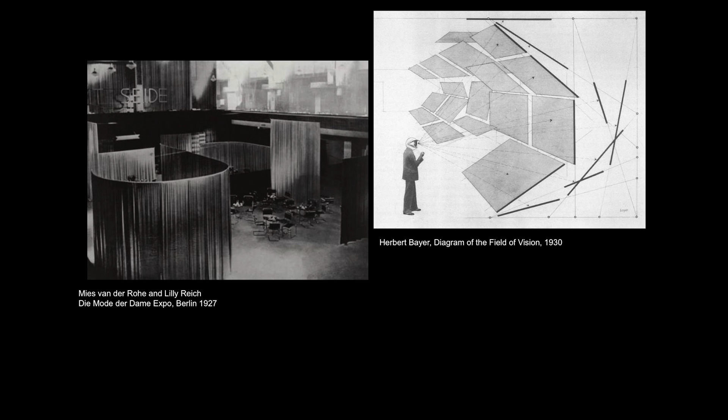We looked at that exhibition quite carefully. I even sent someone who helped me a lot with this exhibition, who I just saw, Colin Spurlman. We said, hey, if you can do it with film, maybe you can do it with architecture. So we looked at other precedents.

At the Centre Pompidou, for example, Morphosis had a large floor with lots of little miniature models, or other examples—Renzo Piano, which you saw here in New York a year ago, or another example of Richard Rogers in London. The point was, that couldn't have been what we wanted to do.

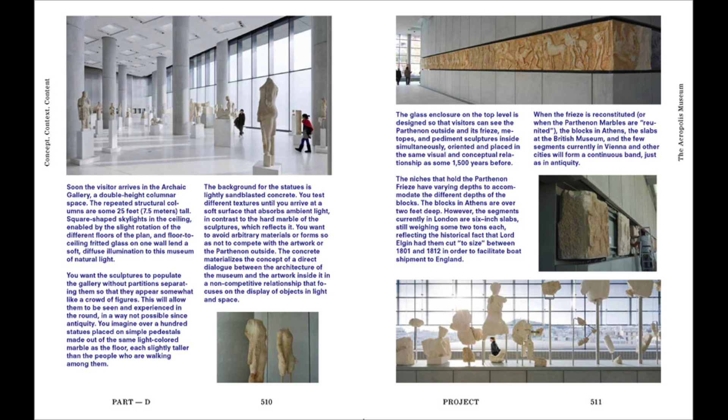These ads were really trying to ask those questions about space and events, about constraints as well. And that led to the Manhattan Transcripts. I'll go quickly because now I want to go through the exhibition itself. So the book was trying to retrace these different moments, including things as crucial as the Acropolis Museum building, or more recently other projects which asked again that question of the relationship between space and material, about materiality, even arriving at rather amusing things when your client is a giraffe or a rhino.

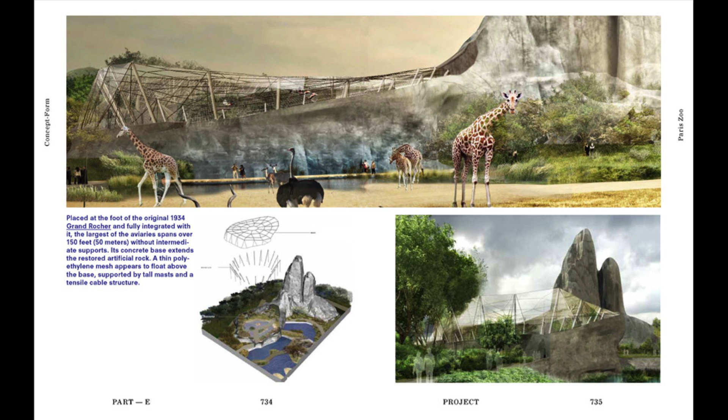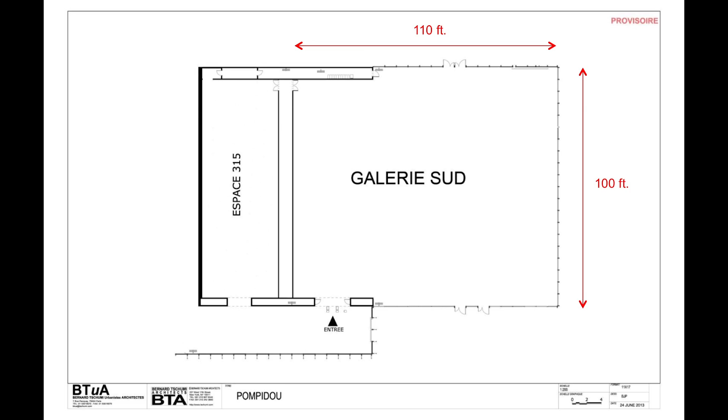A quite unusual challenge, considering that three of these walls are glass walls, in other words they open toward the plaza, and only one wall is solid. So of course it's fascinating as an architect, because you ask yourself first, how am I going to do that? Do I do it with objects, only models? But our models are generally small.

We started to look at themes. These themes could be space and event, the Parc de La Villette, or the idea of program, or the idea of concept form, or things of this sort, which very much came from a series of books that we had done over the years.

In the early days, we didn't have anybody to prepare archives or anything like that. So we thought, since it was so hard to find any drawings that we had from a project we'd done in the past, let's do books. It's faster to look at the dictionary, at that catalog of projects, rather than trying to go into drawers and files. It was pre-computers at that time.

Every one of those thick books, 600 pages or so, was every time trying to find a common denominator of the projects within those pages. So one had to do with space and event, another with the juxtaposition of programs or incompatible programs, another with the idea of context and concept — what is the relationship between concept and context, what is the relationship between content and context, and so on. The last one was about form for the first time. I'll come back to that again as well.

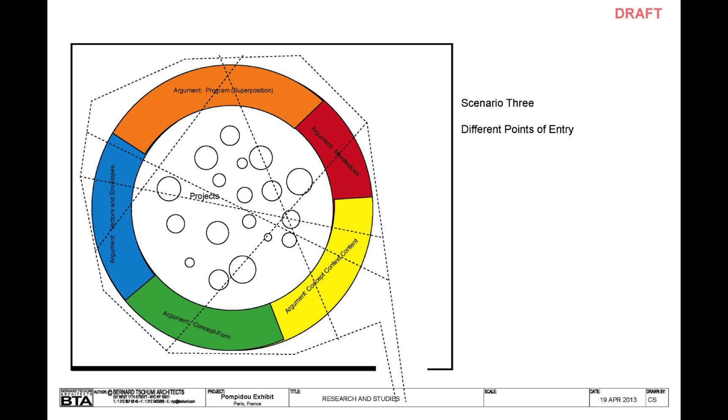So we tried, within that huge square or rectangle of the gallery at the Pompidou, to organize these themes — circles, labyrinths. I was then finishing the zoo, the Paris Zoo, which I'll come back to again, as you will see, which has a certain number of aviaries.

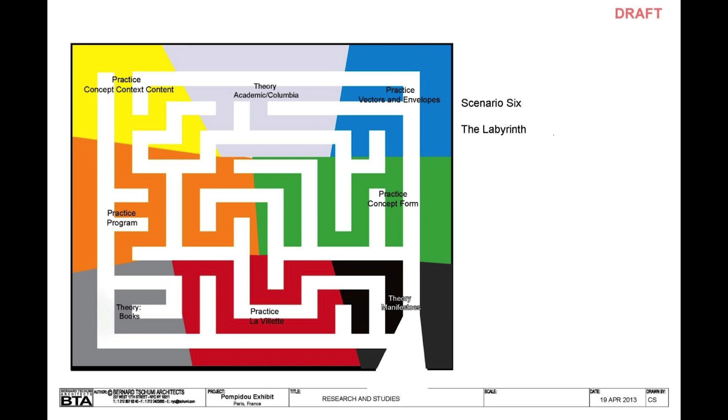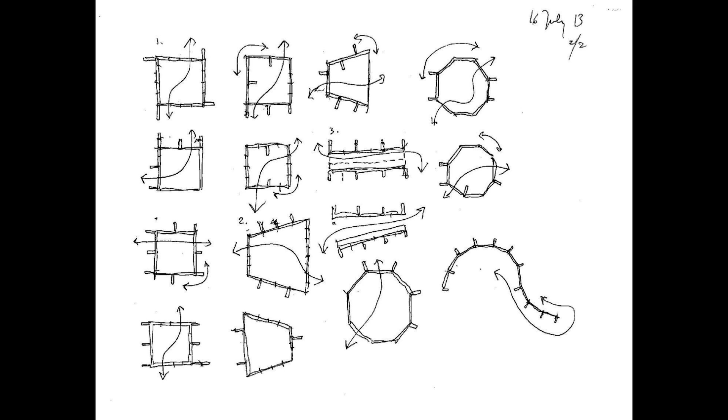And I really like the idea of these aviaries, which are cages, but not quite — they're transparent, but you don't know who is inside, who is outside. So we thought, hey, maybe we can do this, we can organize our exhibition within — since we were opening the zoo exactly two weeks before the opening of the exhibition — why don't we say, just like at the zoo, where a cage or an aviary is as much for people as it is for animals. The whole zoo works on that notion of not differentiating between the habitat of one species versus the other.

So we started to develop a series of enclosures. At first they were made of mesh, exactly like the aviaries. We tried to find also something which had to do with the fact that we had a lot of documents that we had to locate, but again, this will come back in a minute.

You may remember the famous map of Guy Debord, of the situationist, the so-called dérive. We looked at the various themes of the exhibition, the five themes, as a sort of dérive, a sort of drift, so that people could move from one to the other, either in chronological order — we tried really to make them in chronological order — but we knew some people would evade, would escape. So we started to make those in different configurations, with quite a number of alternatives in their location within that space.

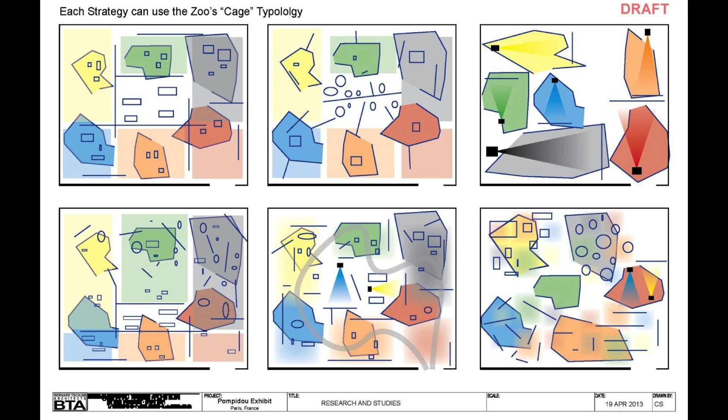We were quite interested in the fact that it was a good way to take over the space, to control the space simply through objects. Of course, you may think of Le Parc de la Villette, which is made of a series of small red objects which allow you to control the space as opposed to walls or whatever.

And then we brought a certain level of rationality into it, took the themes that I mentioned, space and event, or context and concept, or form and concept, and mapped them in relationship to the media we use. That's the blue part, the blue ellipses.

In other words, you as an architect, if you build something, you use a certain media. If you do a drawing, you use another media. If you talk, like I am tonight, I'm using again another media. If I write about something, I use one more. And if I make a film or an animation, every one of these media is quite different from one another. That was important if we were to show how the work unfolded.

And then the little pink rectangles are, of course, the various projects we wanted to show. And then we started to play like a matrix, overlapping the different criteria, and then tried to put the matrix into space.

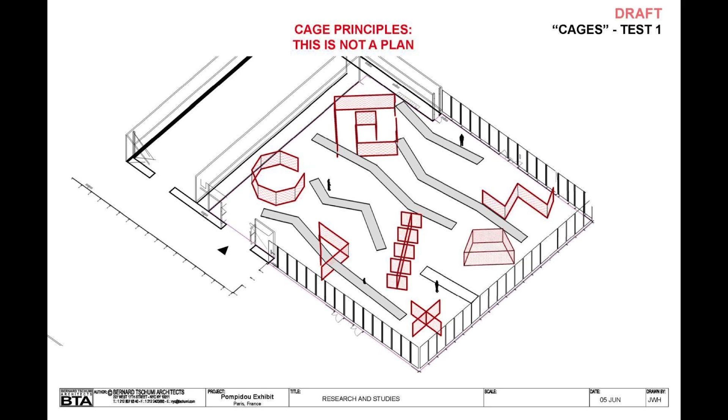And then the tables. The tables were important because as we were organizing the exhibition, we found—I mentioned earlier that we didn't have much of an archive system—but when you organize an exhibition, you open a lot of drawers that you haven't opened for 25 years, and you find a few amazing things.

So we wanted to show them almost as an entomologist would show precious remnants or whatever. We did it first with these thematic bands.

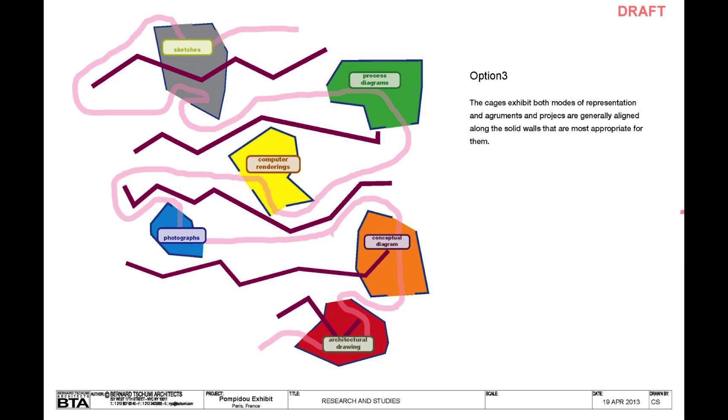We then had the intersection of the bands with the various pavilions. You can use them like that as well.

And then we developed a whole language of caption. Captions were incredibly important because I do not think that architecture can exist without words. I will disagree—some of my colleagues will disagree with me.

It's very simple. Architecture has to do with its own vocabulary. The vocabulary is important—things called columns or pyramids or labyrinths. These are also metaphors that are used by our whole society, and these cannot be distinguished from the act of building itself.

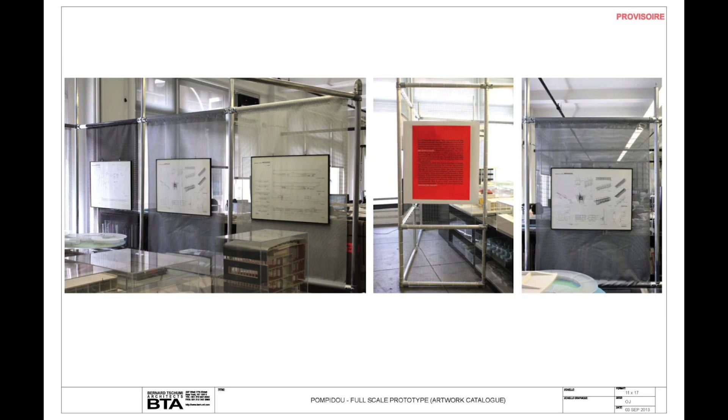We did also a series of mock-ups in our office of those enclosures with mesh, and I won't go into the detail of the reaction of the curators when they came and said, you can't have mesh because you see the legs of people walking behind, or you see the back of a drawing behind the front of it, and so on.

So we tested those, and eventually arrived at this particular image showing the transparency, but also this incredibly important red wall, which was, as I said, the only wall that was there on site.

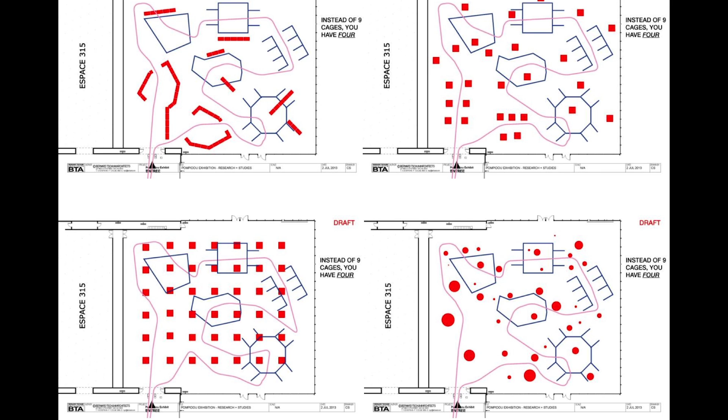I mentioned that the tables didn't quite work as a linear thing, so we could not—and I have to say that was a nudge of the chief curator saying, as we were testing, 'Why don't you do a point grid?' And of course, we did.

So each of the tables was quite important because they were these places where the archives were. And so here you can see the plan of the exhibition itself, a view from the outside.

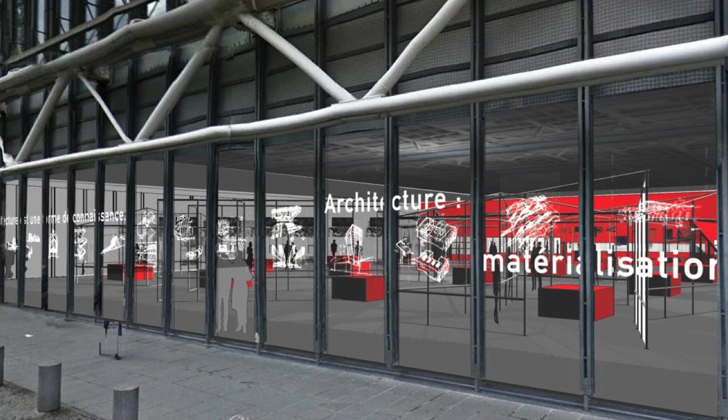Now I'm going to take you quickly through so you have a visual image of it before I start to talk about the content of it.

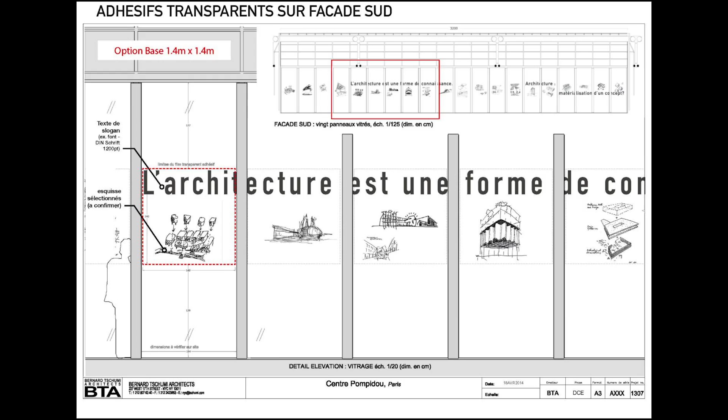In other words, you can see—I mentioned that we have a big glass wall at the Centre Pompidou—so you could see from the street through layers of graphics, you could see the exhibition itself. Probably, while I think the exhibition was visited by just under 100,000 people, there must have been 1 million people who walked past.

So the project becomes really a way to engage the viewer into the work—not only showing it, but literally getting people to do it themselves, with very short text. By the way, you see here on the left wall the Manhattan Transcripts, shown for the first time all together in one single place.

The Manhattan Transcripts, a piece of work I did over a period of 4 or 5 years in the early days here in New York. Some of it is at MoMA now—actually, all of it is at MoMA.

So these are some images of the installation with the enclosures. The enclosures are simply made of hardboard, because the union—I don't know how you'd call the people who hang the work—wouldn't do anything on canvas or on mesh. So we had the cheap boards, but it looked quite good.

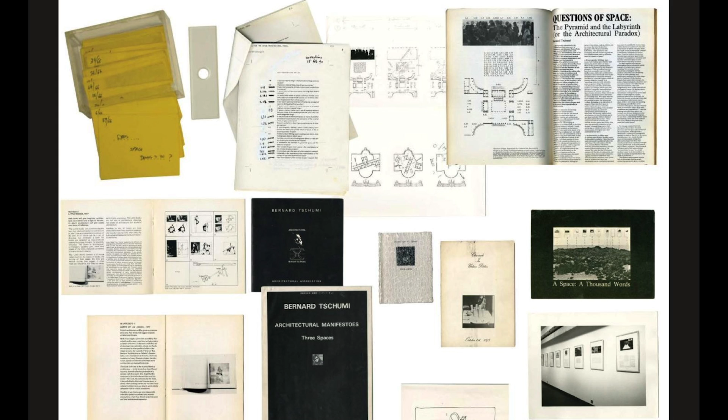And a variety of other texts which were there, from Bataille to Barthes to Roussel and many others, that could act as a companion to architecture, leading to certain important pieces of work which at the time would have been called paper architecture.

So hence this start—I've been quite long going over these preliminaries—seemed important in order to indeed activate the interest of the viewer.

And so then the exhibition would start with that big red wall with the Manhattan Transcripts, which, for those who don't know, are a bit like a B-movie script. It's a form of notation. The subtitle of the exhibition was Concept and Notation.

In other words, a way of thinking how to draw as an architect, how to draw things which are not quite architecture—not simply having the role of the axonometric, the slab, or the columns, but perhaps questioning it in different ways, saying that there's no architecture without movement.

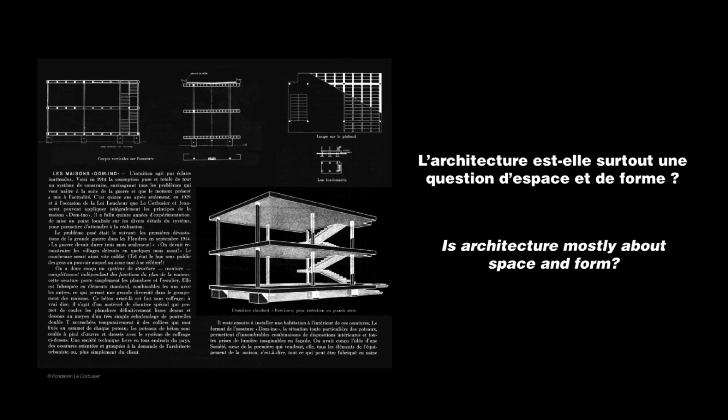You have to find—if I don't draw movement in a plan, a section, or an axonometric, then I'm interested in finding out how to notate, to find a mode of notation for movement, and of course also what happens in it. The exhibition, the transcripts, were really introducing the viewer to this idea that one could perhaps find a mode of notation for things that are normally excluded from the architectural discourse.

The layout of the long drawing—one of the drawings is 32 feet long—was a reminiscence of the first time it was exhibited at Artists Space, which was then on Hudson Street. I think I might have been one of the first, or the first person in this era, to have an exhibition in an art gallery. Architectural gallery had another agenda at the time.

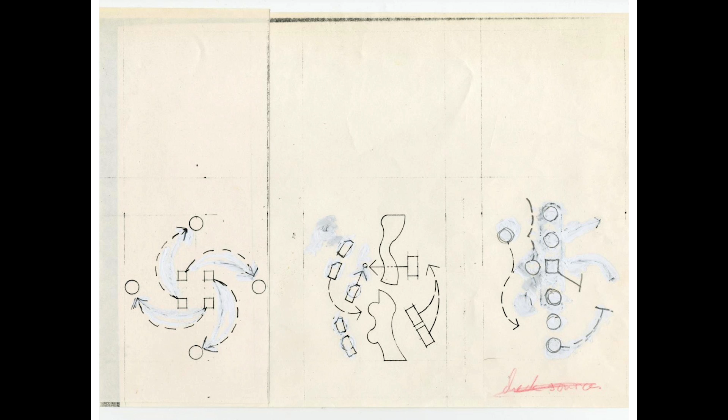Back again, you understand the issue of movement and spaces, and of course the image of Trisha Brown dancing on the walls, on the roofs, was quite important. A number of those documents, those early notations, some self-generated, some found in dance, in theater, in sports, were shown in order to explain the genesis of the transcripts themselves and, of course, the future work. It's not the place here to discuss in detail the various episodes of the transcripts, but suffice to say it was a way to make movement and event absolutely indistinguishable, in a way, from architecture itself.

How can we explain these types of things to a larger audience? It occurred to me that I could potentially do ads, advertisements for architecture. These were amusingly published for the first time in an issue of Oppositions, in an article about transgression. This image showing the decay of the Villa Savoye was an important part of its effect, in a way.

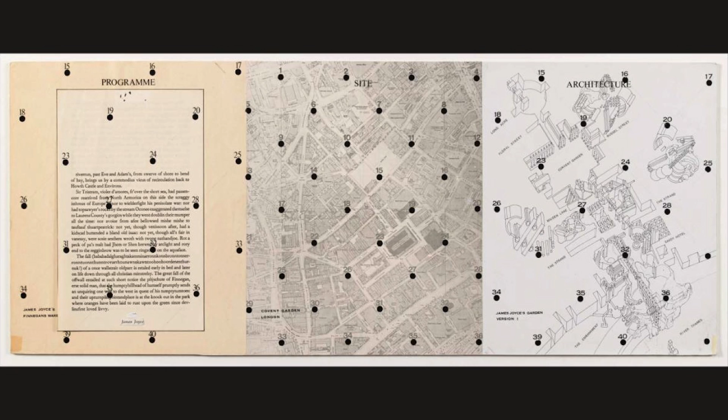At that time I decided to do it myself with my students, starting by first establishing a grid, a point grid, and using the point grid as a way to anchor the discussion and the discourse, developing a project which would indeed be not a transposition, but a sort of re-questioning of ideas about language in an architectural manner—in the same way James Joyce had asked certain questions in a literary manner. In other words, not trying to transpose or imitate, but simply saying that in other fields there are certain questions, perhaps coming with the 20th century, that are of interest to architects.

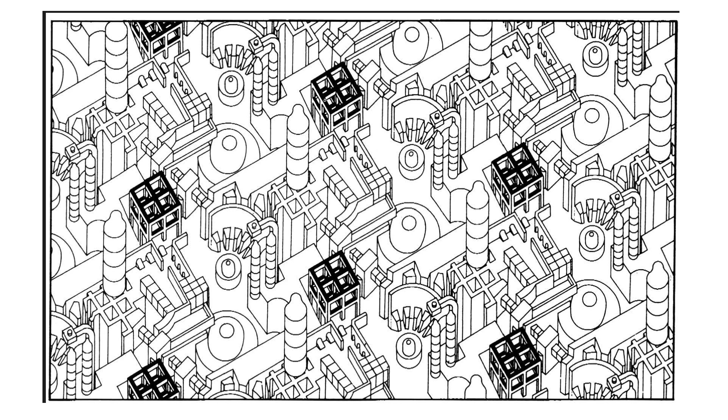I'll leave that—a little work where everything is drawn by hand, right on slides. You don't do that with a computer anymore, but here you would draw your drawing, about 1.5 inch by 1.5 inch. You project it, and you can have an instant lecture. So that was the early drawings.

The James Joyce Garden I always present because, in so many ways, it is one of the features of the Parc de la Villette—the system of points.

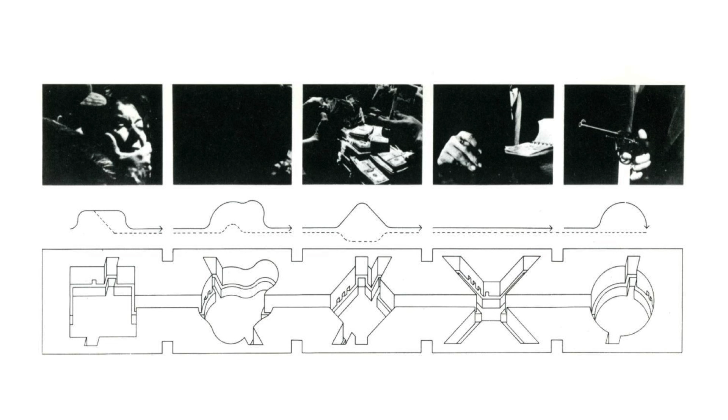And then, of course, if one wants to look at film, the idea of film is something that, as I mentioned earlier, cannot be separated from architecture, simply because the movements of bodies in space—the space itself in a film—is one of the protagonists of the action, or the actors. Much work, the screenplays—I'll go very quickly over that, except to say it was interesting. I didn't discover it myself.

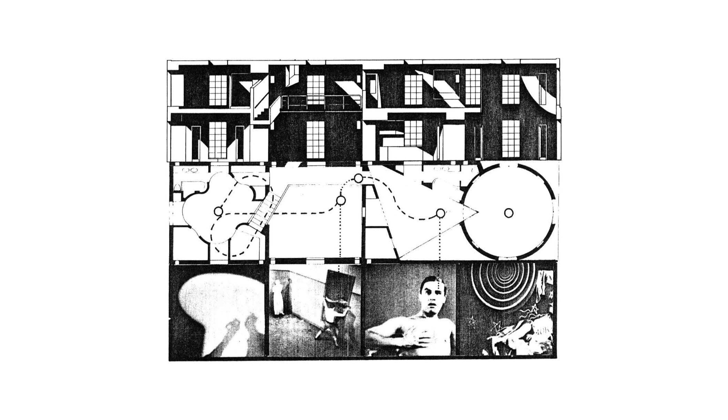It was when the curators came to the office and started to look at stuff. They suddenly saw a strange drawing, which sort of looked like a screenplay that was trying to become a house. And of course, something I had carefully erased from my own memory, there were these drawings - the sequential house, which was not built, but basically a direct translation of this work on the idea of sequence.

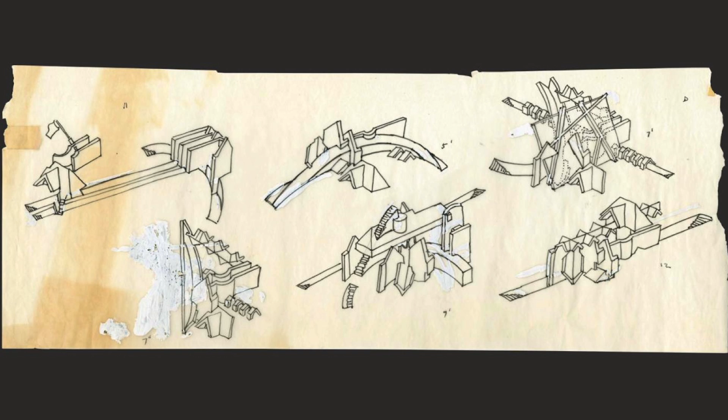And this sequence, whether continuous or discontinuous - in this case, discontinuous - experiment in 3 dimensions, the transcripts are simply notation in 2 dimensions, were a test of doing a strange type of construction. Look at this. This was both in New York City, we're talking about 1978, one in Castle Clinton, and the other one on Hammarskjöld Plaza.

At the time, artists were quite interested in doing what they called installation context, site installation or site-specific sculptures. I was not terribly interested in becoming a sculptor, but quite interested in trying to test some ideas that had been drawn on paper and turn them into construction. So with a very low budget, I think it was always between $1,500 and $5,000, including demolition, which was the most difficult part of it.

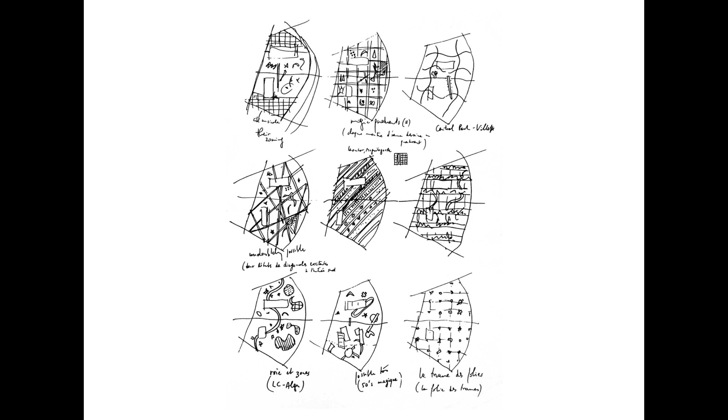So let me get back to the exhibition. I won't go too long on the Parc de La Villette, it's well known. I will just show you one drawing which I find important. Of course, in the show there are a lot of those early modes of notation trying to express the idea of movement in space and how it translates eventually into a real building.

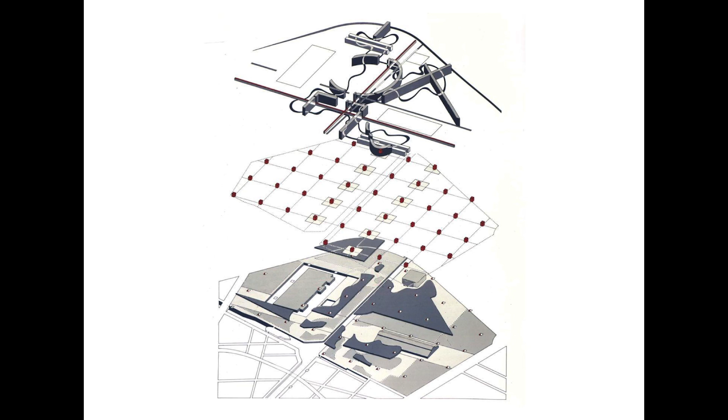I want to show this drawing because it's the actual drawing submitted for the competition. Now, those of you who are architects know that if you were to present this type of drawing in a competition, you'd be immediately excluded - you wouldn't have fulfilled the requirements of so-called hyper-realist images. Try to tell me which ones are the trees - they're not green, right? The buildings are red. Who would do a red building?

It was another era, an era where it was possible for a jury or a group of citizens to decide on a project amongst 400 or 500 competitors without having to be held by the hand and shown what it looks like. People maybe could think a little, but we can discuss that later if needed. So the general project becomes indeed - but I don't want to get onto that.

Back to the exhibition. So we just saw the first theme, space and event. Now the second theme was program and juxtaposition. The idea of program is really important in architecture. Again, if this room is being used as an auditorium, it's quite different than if you use it as a place for worship or as a bowling alley.

In the same way, there were those short films or animations - I called them the silent lecture at the exhibition - where you would ask people, what is it? Is it a church? Is it a sports gymnasium or a voting booth? Or is this person cooking in the kitchen, or are they cooking in the woods? What is the correlation? Or playing hockey in your living room? Or, of course, which one is the car park and which one is the museum?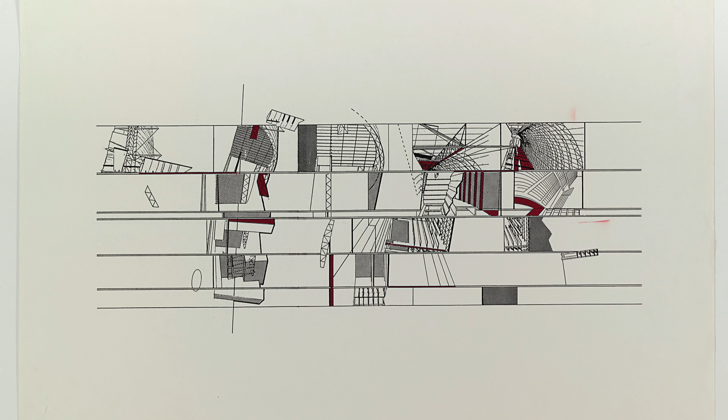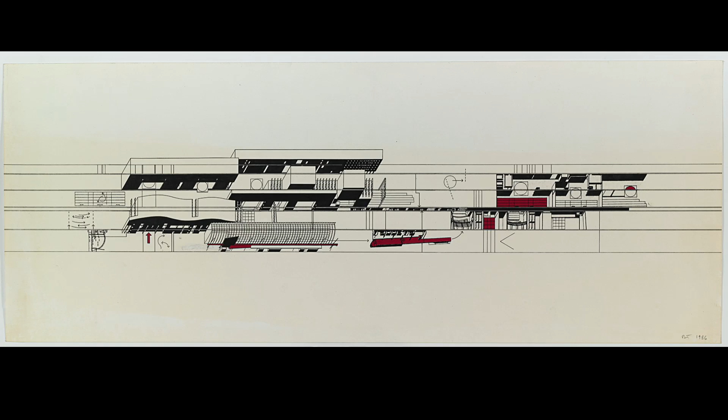This was the starting point of a whole series of experiments trying to find another way to conceptualize a piece of architecture that eventually would, of course, look like a regular plan, look like a regular model, but the process was very different and made your approach quite a different one.

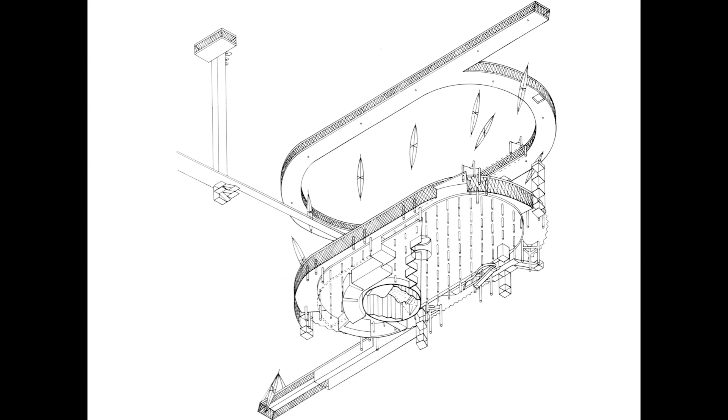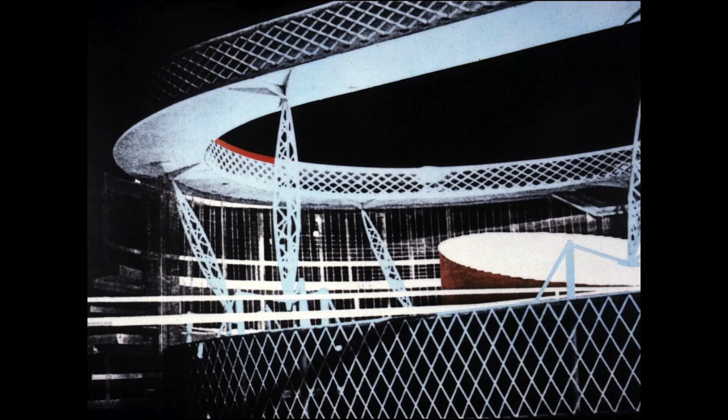The principle of juxtaposition, of a superimposition of incompatible functions, led to some provocative examples, like having a running track intersecting a public library. That didn't work quite well with the jury. I was kicked out right then.

However, when we did a competition for a very large airport, the Kansai Airport, by the way, I'll open a parenthesis. It's interesting, there's a generational discussion. It was possible at the time for a generation barely in their late 30s, early 40s, to be invited to participate in a huge competition. Today, I think it's very difficult for that to happen.

In this case it was Kansai Airport in Osaka, when one had an office with only 5 people. And that's maybe unfortunate, especially in that particular case. We rewrote the program. We said your program is missing a great opportunity to turn this long, 3 kilometers long airport into a linear city, a place active 24 hours a day with offices, museums, shopping centers, hotels, etc. It's 1988 - everything an airport has become now, but at the time it was not. The jury this time did not kick us out, gave us a second prize and a fair amount of money, so maybe we were on the right track.

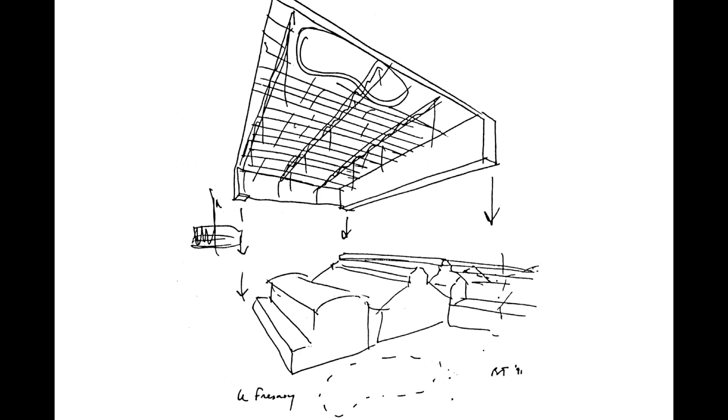So arrives another opportunity. La Villette is under construction by then. It's a building which has received its demolition permit. At the time, it's interesting I mention the word envelope - I'll get to this in 30 seconds. The building was to be demolished, but inside there were quite extraordinary spaces. The roofs were quite incredible. And I thought, hey, what about wrapping it around, keeping the building? Not that I was particularly interested in historic preservation, but I thought the building had definite historical value, or simply it was a reasonably good building, and I wanted to keep it.

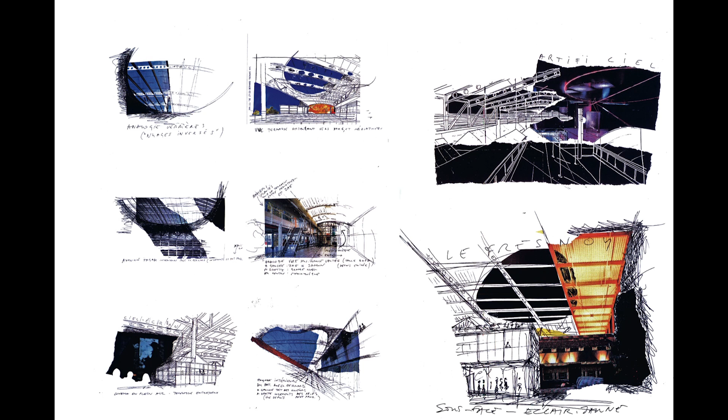So we built an envelope around it that would become literally a sort of - how could I say - it would allow the possibility of something unplanned, in other words, between the outer envelope and the interior envelope, to have exactly this place of events that I had been discussing in the case of La Villette, but this time on a much larger building in 3 dimensions.

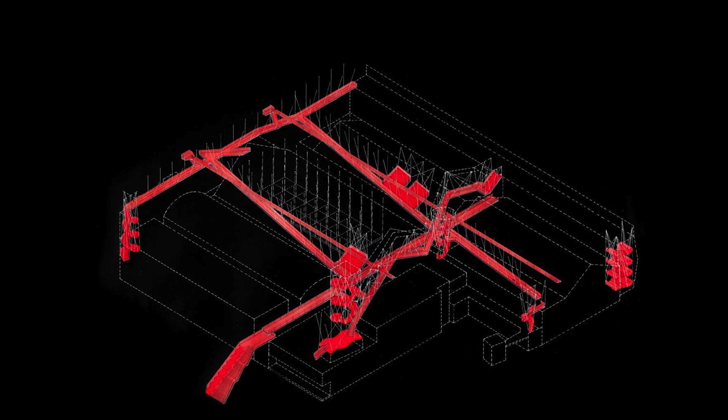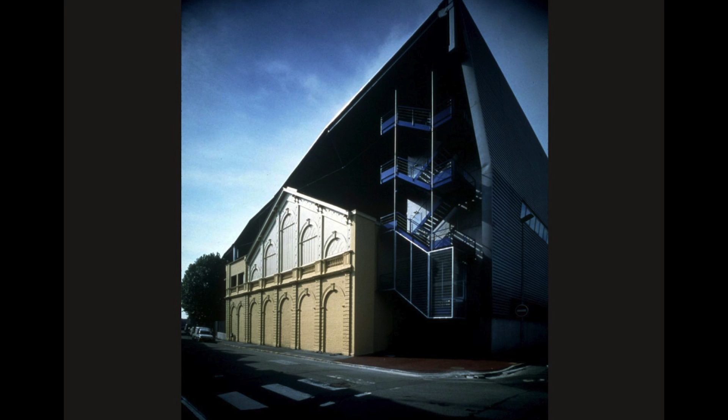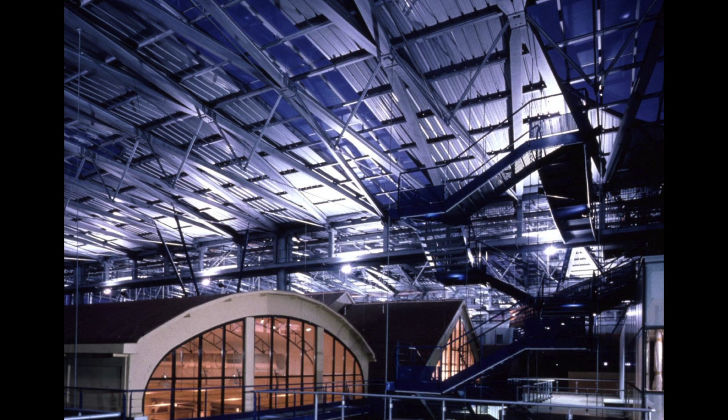As you can see in this image on the screen, the envelope - and I think that's probably one of the very first times, it's 91, that the word envelope is used in architecture - the outer envelope is there to protect the inner envelope, in other words the existing building, but also to provide a found space, a space that can be appropriated by the artist. By the way, the building is a sort of art cultural center.

Turning it into not a composition but much more a conceptual strategy, the fact of simply superimposing the 2 systems, the one that existed, the old, and the new that you added, creates something that not only established a dialogue, but established a potential for takeover and events.

Simultaneously, as you can see from this image - and this is what was interesting with the Pompidou show - was the fact that there was the possibility of diverging from the main story. One of the things that interested the chief curator, Migayrou, he was saying, Bernard, your importance - using his words - was because of certain relationships that were established between architecture and literary theory, for example, or philosophy, that was in the very early work.

But also by having us starting what we did at Columbia in 1993-94, starting the so-called Paperless Studio. So we showed at the exhibition interviews of Greg Lynn, Hani Rashid, Bill MacDonald, and a few others, showing something that for me had very little to do with technology, but everything to do with notation. In other words, just as you don't think in the same manner if you use film or if you use writing or little scribbles, you don't think exactly the same way when you use a computer.

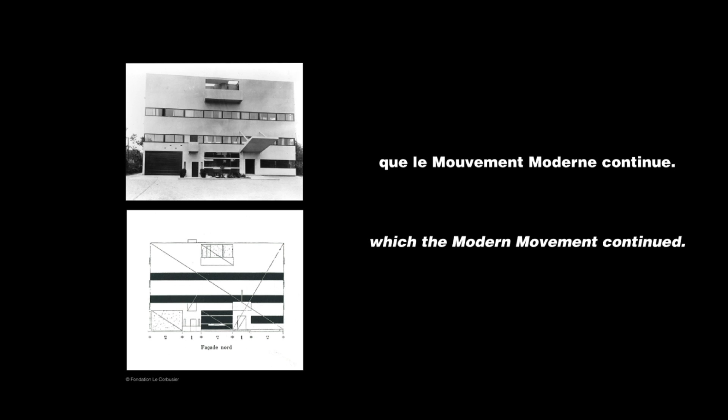By the way, envelopes are a fairly recent invention, as you probably know. The Renaissance invents, in a way, the facade, something which is separate, which is applied from the structure itself. Le Corbusier continues absolutely using the similar proportional system, when in reality the architecture as envelope might have been probably something much closer to the reality of the environments and of enclosure and shelter.

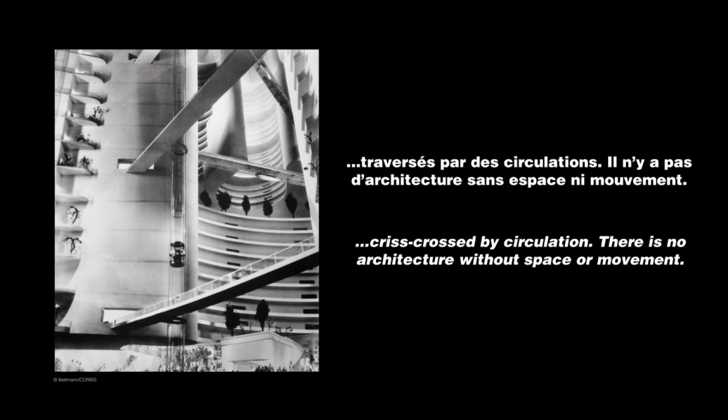So the questioning of taking away these received ideas, this dictionary of received ideas and cliches of the vertical facade, the horizontal or pitched roof, and the cornice in between, we tried to work in a slightly different manner, adding the vectors in between, because there is no architecture without an enclosure and a way to get in or out. So sometimes those vectors are on their own.

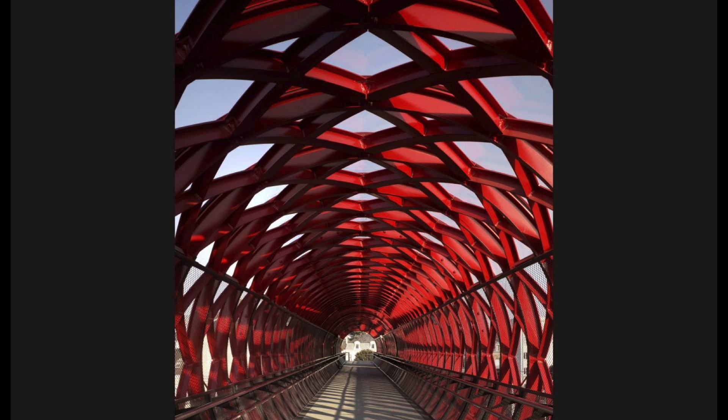I won't talk too much about this drawing, but this building, a walkway in the west of France. The first envelope project was, or the second if we count Le Fresnoy, the one I just showed before.

Here we have the idea that if you have to do, that was a television, video and music festival, needed a particular building to shelter people from the rain. We decided to make it, as opposed to what other people would do, and instead of making it as a private enclosed environment, we made it as a very transparent, public one.

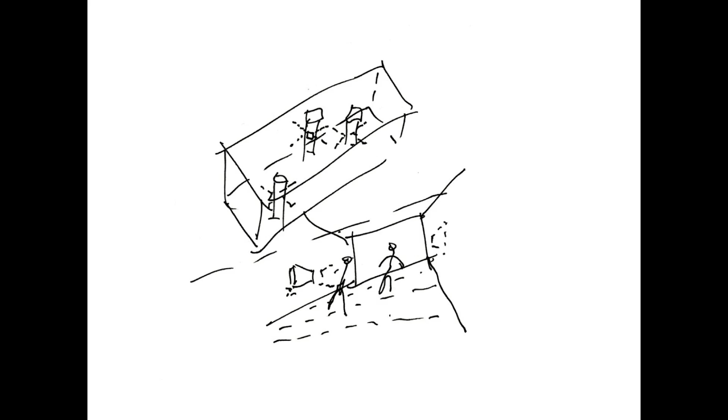I always maintained that it was the real glass house, because if you take the glass out, the vertical walls or plates and the horizontal beams are all made of glass. If you take the glass out, you don't have anything left, as opposed to Mies or Johnson's glass houses.

What was most interesting about it was the fact that once the temporary construction had been built, it was kept by the city of Groningen, part of their art program, and turned it into a place where they would have events.

We are going to celebrate the 25th anniversary of this. It is still there. It was meant to be there for 2 months. So in other words, the idea of what is an enclosure and how its meaning is derived by what happens in it has nothing to do with style. It has to do with how you organize and how you, in a way, stage circumstances.

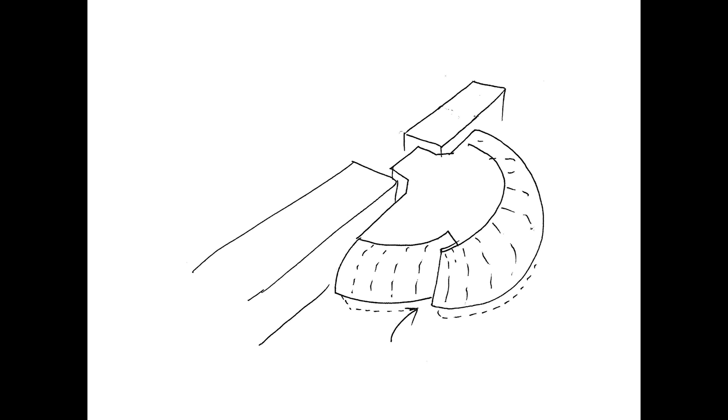Other projects followed, much bigger. Interestingly enough, the bigger a building is, the more the envelope becomes important. The most expensive part of the building is often the enclosure, its wrapping.

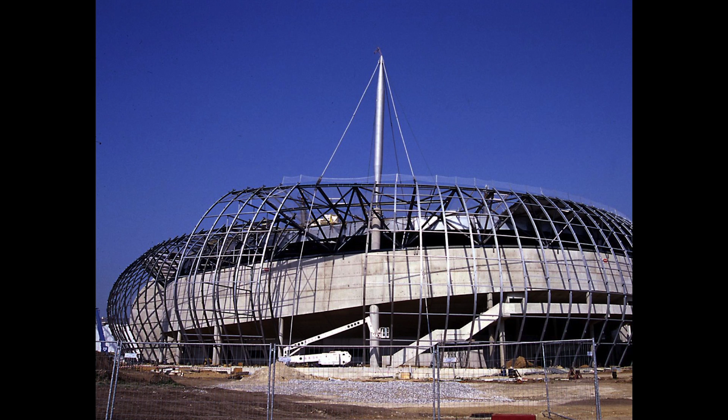And here at a 6,000, 7,000 seat concert hall in Rouen in France, where the double envelope is here, you see it as an X-ray. The double envelope is really what allows you to stage what happens in the building. In other words, the outer envelope was made of steel, the inner envelope was made of concrete, and in between, of course, were the crowds moving in and out.

Even the transparent seats were there to make that clear point that it is people who activate the space, and it's not the architecture itself.

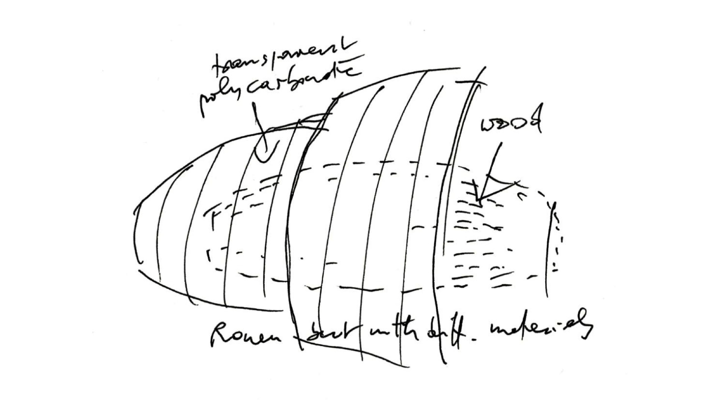When we were asked to do another of those buildings in the middle of a beautiful forest, we said, let's not do steel and concrete, let's test one thing. And now this is really important. We took the same concept, exactly the same concept, and said, let's now try to use different materials.

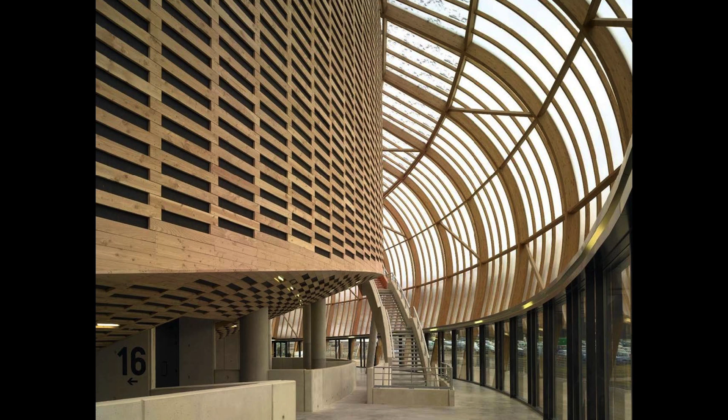In other words, polycarbonate on the outside, wood on the inside. In other words, acting not anymore on the level of concept, not anymore on the level of content, but possibly on the level of percept, but possibly on the level of affect. Those two buildings look very, very different, whether they are made of wood or whether they are made of steel.

And hence, something else was an interesting lesson about what is architecture. Here again, a view from the inside.

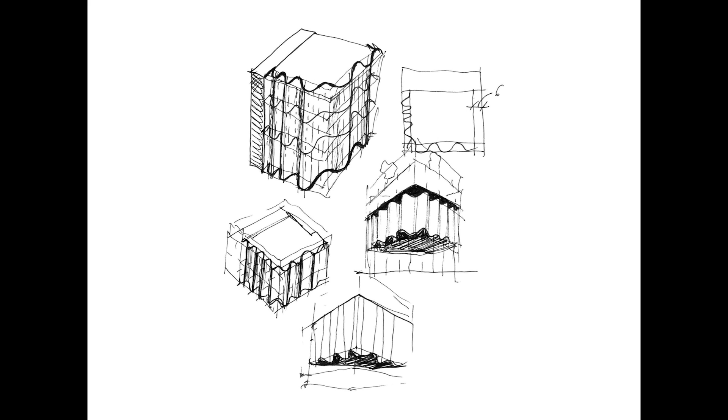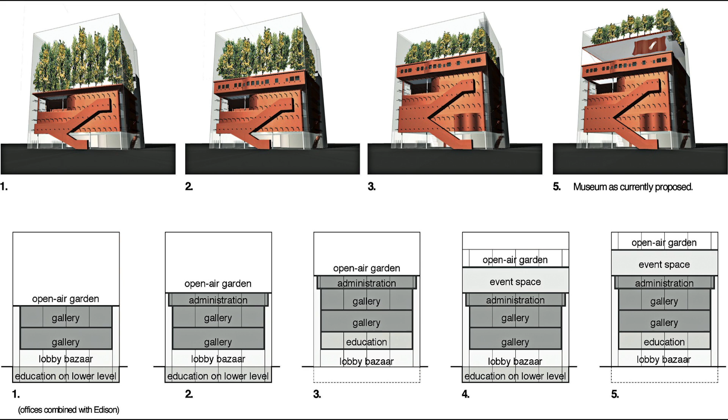Projects developed, always exploring, every time asking a question. Here's an ill-fated attempt to design a museum for African art. Beautiful project, I believe, but site circumstances, ownership, and real estate made it impossible to complete. But other projects come about, and here in this particular case, very briefly.

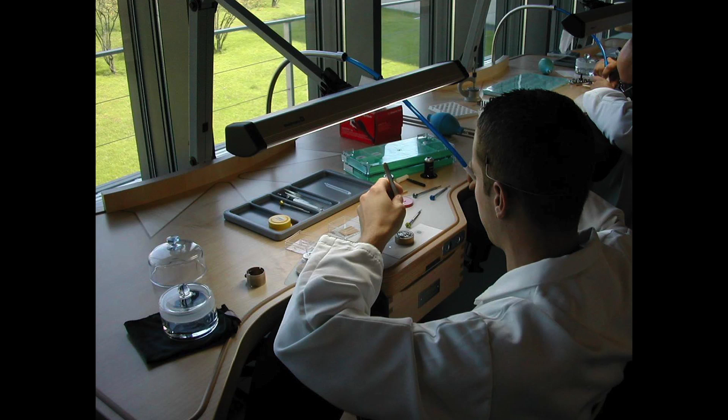A watch factory near Geneva, where my question was: how can we have the factory workers and their bosses, the directors, be under the same roof? In other words, continuing the discussion on the envelope. By the way, these sketches are for most projects—I always try to find very quickly, through a quick notation, I prefer that word to sketch, even small drawings, the power that a particular envelope can have in becoming a common denominator.

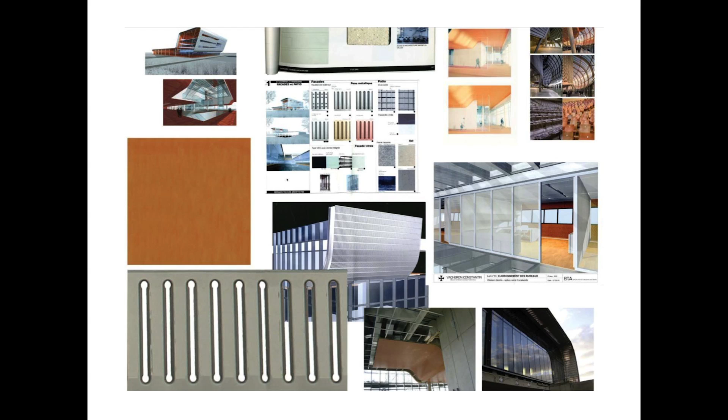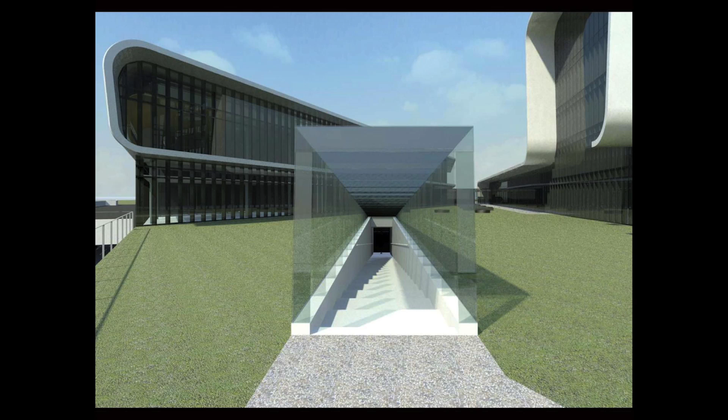Here the outer envelope is made of steel, the interior envelope is made of wood, the two are just collapsed onto one another, and a third material is brought in, which is glass, for all circulation. In other words, limiting the number of materials—there was a table at the show with the real materials—limiting the number of materials in order to come as close as possible to the concept itself. We're building the second half of this building now, using the same strategy. Now I'll come to the fourth and fifth part very briefly.

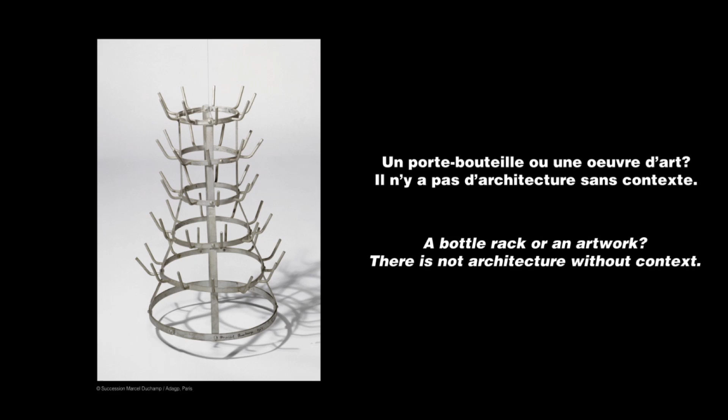Duchamp, exactly 100 years ago in 1914, had understood that very well, as he placed a bottle rack or a bicycle wheel or a urinal in museums. In other words, it is the conditions that make it so. But can you, in a way, if you have a context, conceptualize it?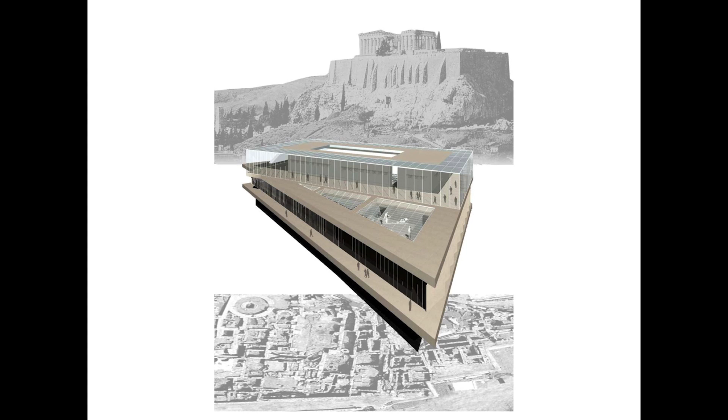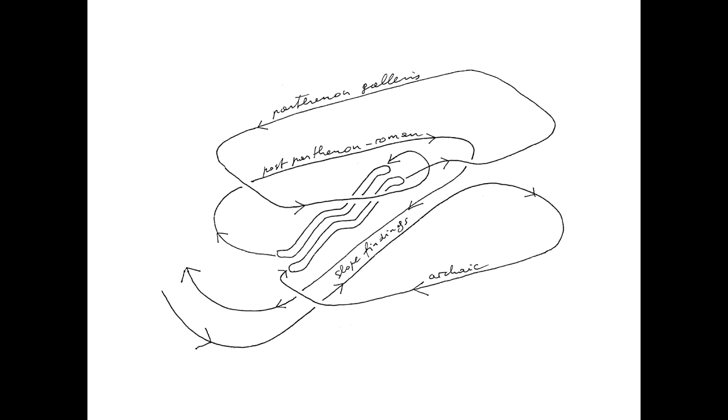And that was the challenge for the Acropolis Museum in Athens, where the context was incredibly complex—namely the excavations, the Parthenon, the most admired building in the history of civilization and of architecture. How do you feel when you're building 300 feet, or 300 meters, away from it? So the concept was really trying to work with this layering of three different logics: the logic of the excavation, the logic of the temple, and of course what was in the museum itself.

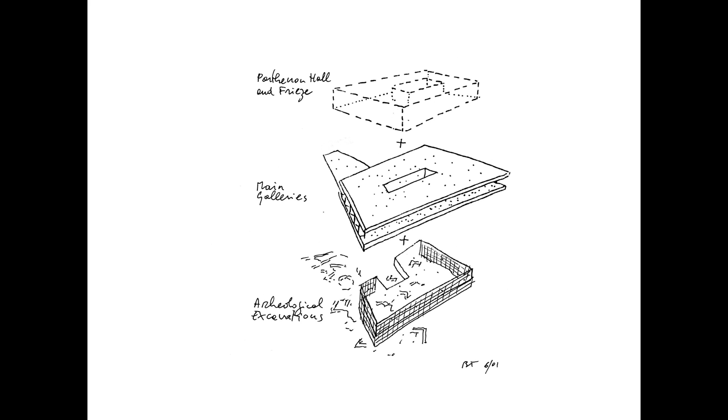Movement through the building and so on. Eventually, the building becomes exactly the conceptualization of the context in which it takes place. It's not based on a series of a priori ideas of what the modern movement is, or imitation of circumstances—it's something that is directly, in this particular case, a conceptualization of the context.

That's what the British Museum has completely wrong. They show the Elgin marbles, as I think they still call them, as a canvas, as a big tableau, when in reality they were meant to be looked at as a route, as a travel. That's what we tried to do with the Acropolis Museum, also playing on the idea of fragmentation and so on. We were blessed with the fact that we were entirely responsible for the layout of the artwork and didn't have to play around with stage design.

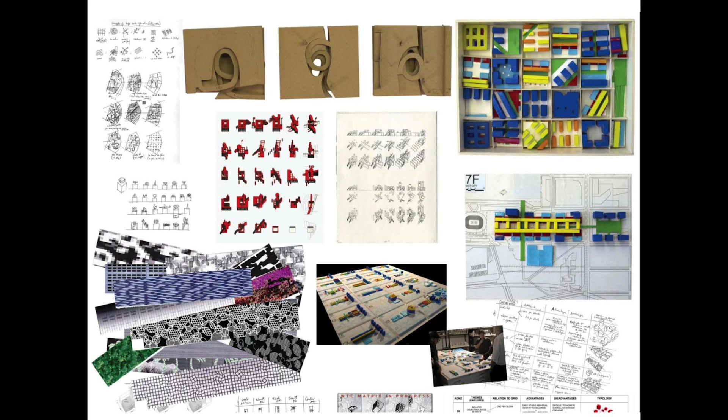Amusingly enough, I did a competition the other day that we lost. The jury complained that during the first meeting—we met three times with the jury—I showed them different configurations the building could have. They thought I was trying to appear really nice to them. In reality, no—I think every architect never starts with an a priori idea, but on the contrary tests what works best, or works least bad.

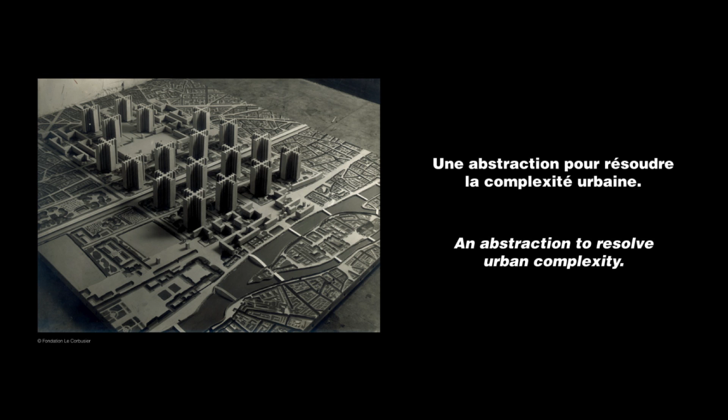So this now, other project. I'll go now to the final part, form concept. You may have noticed that I don't believe I've used the word 'form' a single time during this talk. We had never used it in the office, trying always to get away from this very hot potato, until the day we realized that there are certain programs which are so complex and so complicated that you cannot avoid using a form.

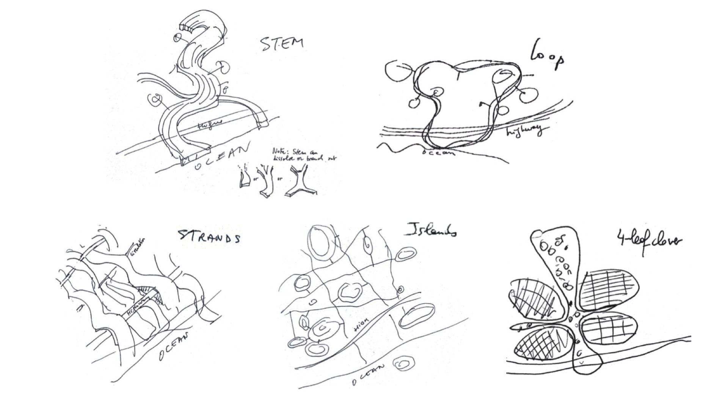In other words, design an area of a city, you're stuck. There is no logic in designing a city. So in this particular case, we started to develop what we called a concept form. It's a form which, in a way, generates a concept, or a concept that generates a form.

You will recognize a lot of these. They are throughout the history of architecture, and they happen whether they are in so-called regional contexts and whatever.

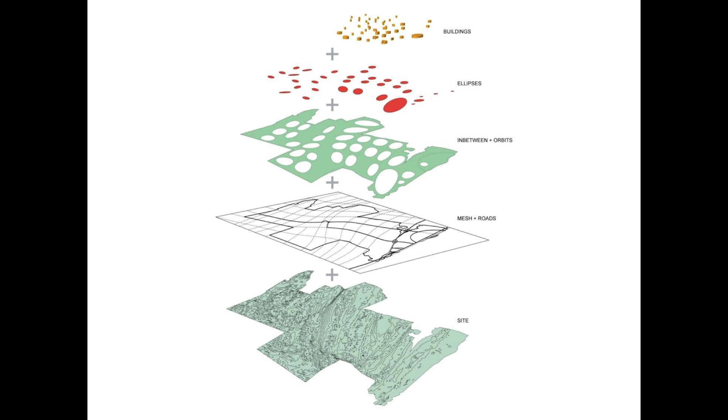So in many ways, some of our projects then developed in this manner, trying to find the notion of landscape. Landscape is artificial. Don't believe those who say that it's in nature. Nature is everywhere; you invent landscape. Lefebvre talked about the fact that the landscape of Tuscany is nothing but the projection of society on the ground.

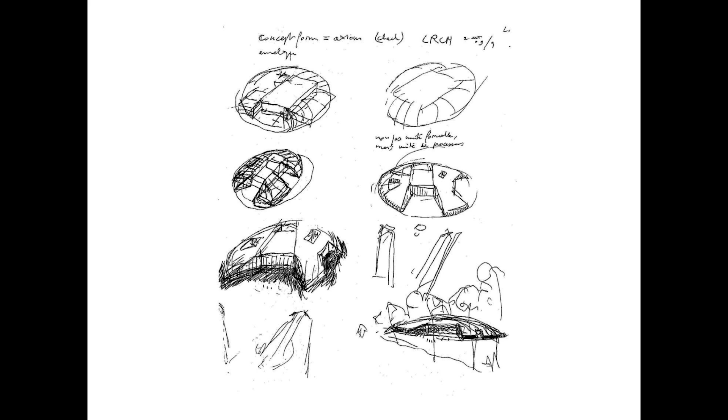So I'll leave that project. I just want to show you one we just inaugurated a few weeks ago, a concert hall. The concert hall is entirely made of wood. It's a rectangle, a shoebox under a dome. The dome is made of steel. In between, it's concrete, again playing with the conceptualization of material.

With simply a very simple geometry - by the way, spheres are never simple geometries - and then having the in-between space, the space that the audience, or students, since it's part of the college, can take over. I'll just show you some of the images.

The wood, by the way, interestingly enough, is OSB. It's a sort of compressed wood, very cheap, but very heavy, with incredibly powerful, very good acoustical characteristics, while being probably the cheapest wood you can use, the wood that's used to do construction work. Here are some of the views.

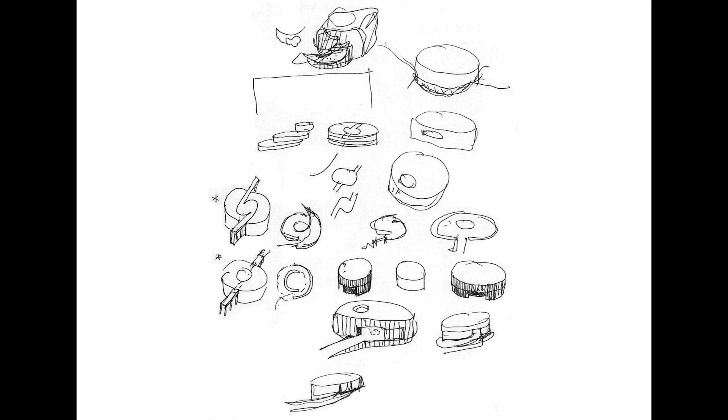Briefly, also in the principle of the concept form, Alesia, the museum at the location of a famous battle between the Romans and the Gauls, taking the route that any museum uses where you start and come out at the same place, but at the same time using that circularity to echo the circle of hills where the various military troops were placed.

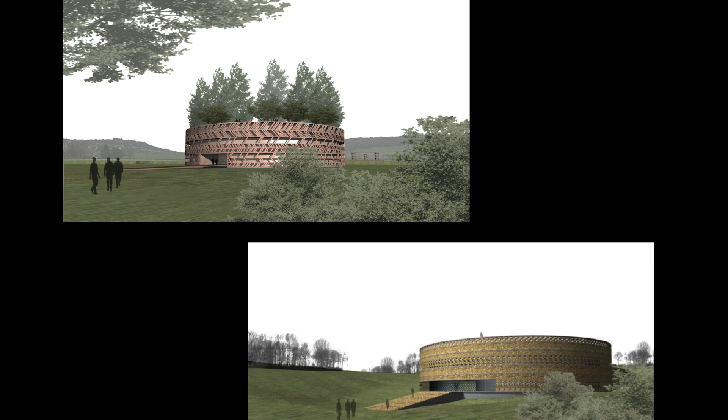Interestingly enough, here again, two buildings that echo one another - one is a museum, one is a center of interpretation. The center of interpretation is made of wood, the other is made of stone. Here are some images of how the second envelope acts not only as a filter for light, but also as a way to absorb light in order not to make that building too much of an imposition on quite a beautiful landscape.

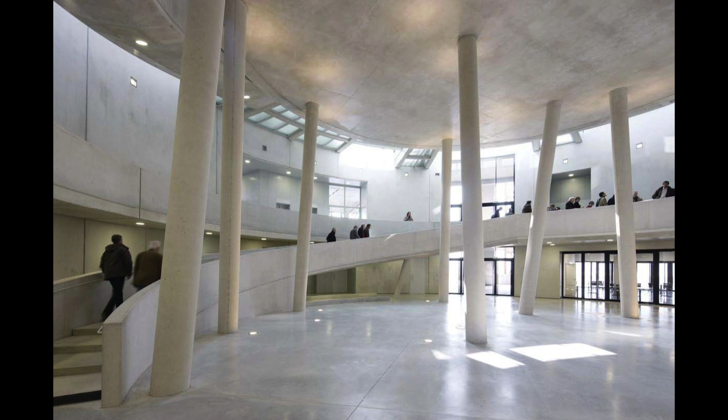Inside, again, a route, again only one material, concrete, for the inside. In other words, that restriction of trying to stay as clear as possible in one's conceptualization.

And then finally, the Paris Zoo. Paris Zoo is always an unusual, interesting thing - who is inside, who is outside? Are you in? The giraffe is inside, or you are? So that was the theme of the project, and the project itself became an exercise in using only three materials.

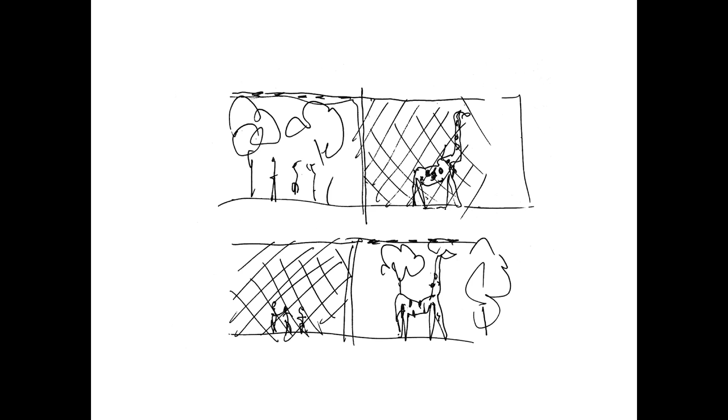The mesh, because you always need meshes, glass for tropical greenhouses, and wood to protect the animals from themselves, in a sense.

Quite an extraordinary photograph from Iwan Baan showing the zoo from above. It's much smaller than the Bronx Zoo - probably a third of the size.

The theme of the aviaries is taken again for the entrance, where the public enters an aviary, and then as you get to the places where the animals are located, whether you are going to a restaurant or to a shop, it's always using the same vocabulary.

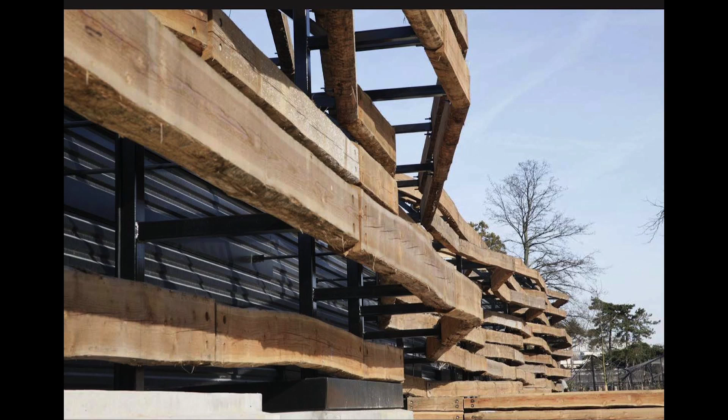In other words, continuing with the same themes as I used in Alesia with the very large wood beams, but this time in complete disorder. If I talked about concept form early on, here it was trying to talk about the concept inform, or the informal formal. And in the other images, once again using that rigorous desire to take architecture where it matters the most - in between what I would call a concept and a material. Thank you.